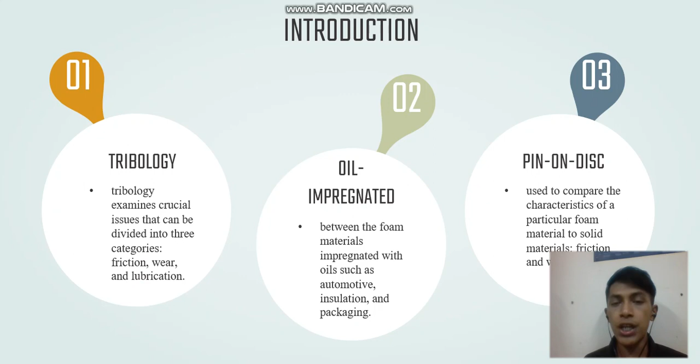Now to the literature review. First and foremost, oil impregnated materials, due to their low weight, excellent thermal and acoustic insulation, and high energy absorption - foams are frequently employed in engineering.

According to historical evidence, people have traditionally used vegetable oil as a medium to lessen friction and wear. Plus, researchers classify synthetic lubricants in various forms, including PAO, polyol ester, and polyalkylene glycol (PAG).

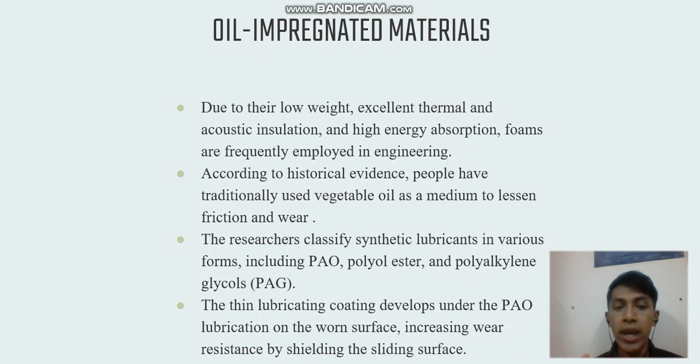The thin lubricating coating developed under PAO lubrication on the worn surface will increase the wear resistance by shielding the sliding surface.

For the other aspect of tribology, friction: friction is the force that prevents sliding, depending on the contact between sliding surfaces and operational factors including roughness, degree of work hardening, and surface cleanliness. Friction in a mechanical system may rise or decrease.

I will also use pin-on-disc testing to find the coefficient of sliding friction and wear. The sample is tested for up to a certain time at room temperature, with a linear velocity and vertical load applied.

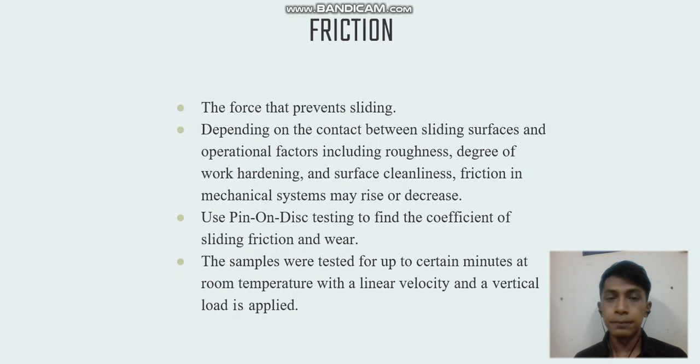For the other aspect of tribology, wear: wear happens when two surfaces in relative motion meet one another, generally in a dry run. Sarkar (1983) noticed that material is lost as debris, which is referred to as wear, when two components slide past one another.

The wear in a steady state pin is utilized to determine the wear rate when a load is applied. Thus, in this investigation, the researcher used the pin-on-disc to calculate the apparent contact pressure.

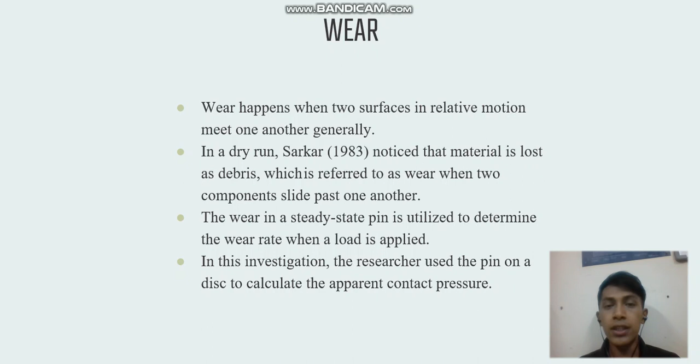I also studied lubrication. A lubricant is a substance that acts as a coating between two moving parts to reduce wear and friction. Lubrication occurs when two surfaces are coated with a lubricant. By adding an additive, the base fluid may create a new property or improve an existing one to increase the lubricant performance.

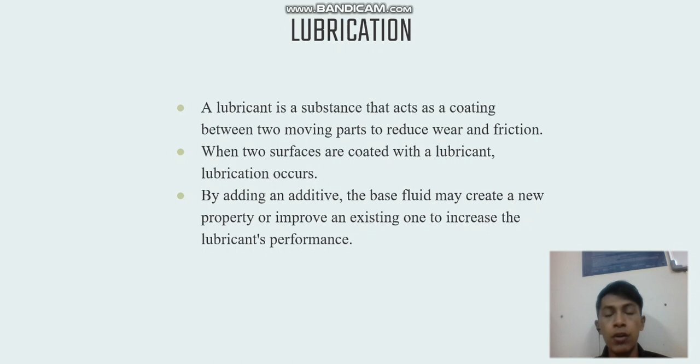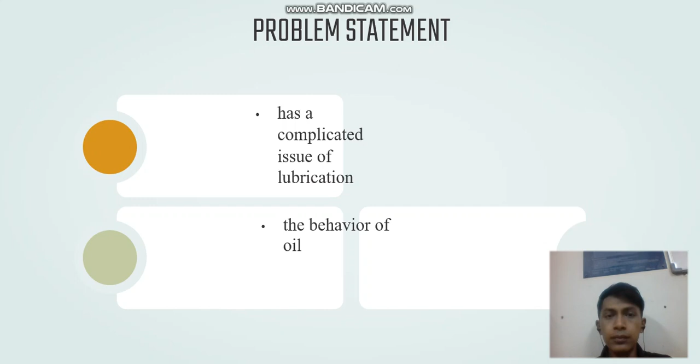I have listed the problem statement. First, in this study I have identified that there is a complicated issue of lubrication, and also the behavior of oil.

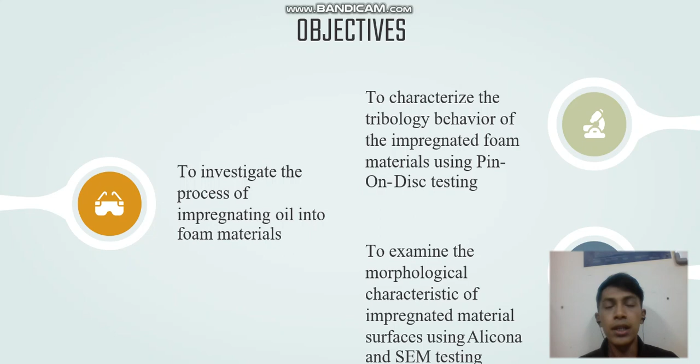So to achieve the study, we must first achieve the objectives. First, to investigate the process of impregnating oil into foam materials; then to characterize the tribology behavior of the impregnated foam materials using pin-on-disc testing; and then to examine the morphological characteristics of the impregnated material surface using Alicona and SEM (scanning electron microscope) testing.

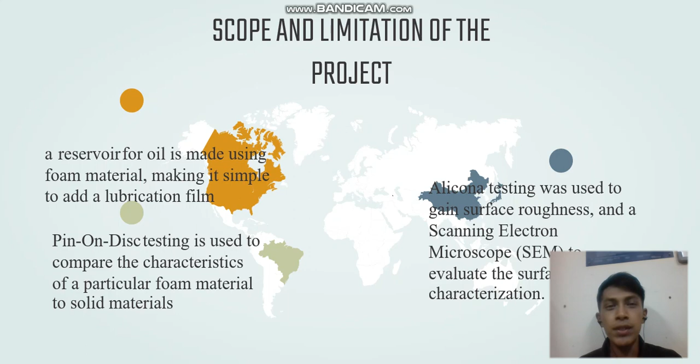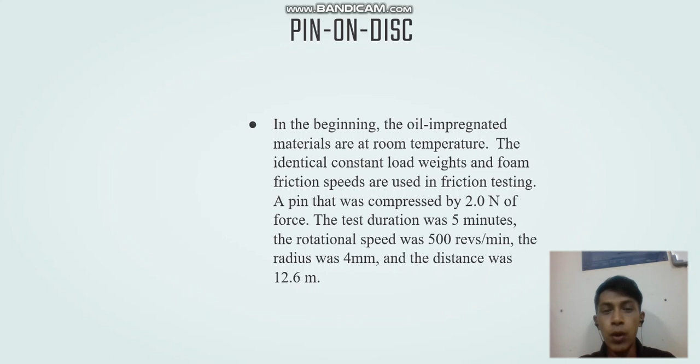For the fourth content, we go to methodology. Pin-on-disc: in the beginning, the oil impregnated materials are at room temperature, and identical constant load weight and friction speed are used in friction testing. A pin will compress by 2 Newtons of force for a duration of 5 minutes, with rotation speed of 500 revolutions per minute. The radius was 4 mm and the distance was 12.6 meters.

For the Alicona testing, it is an optical 3D measurement tool that uses the infinite focus microscope. Alicona was used to quantify and analyze the surface roughness.

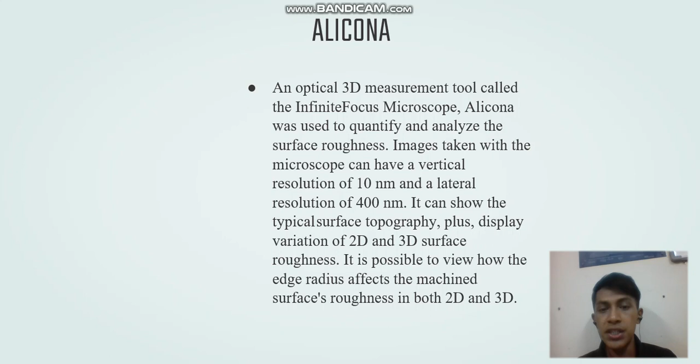When we use the microscope, it captures images with a vertical resolution of 10 and a lateral resolution of 400. It can show the typical surface topography plus display variation of 2D and 3D surface roughness. Thus, it is possible to view how the edge radius affects the machined surface roughness in both 2D and 3D.

Lastly, for the scanning electron microscopic analysis: SEM means a thin electron beam focused on the sample with high energy. In addition, the SEM generates high resolution images.

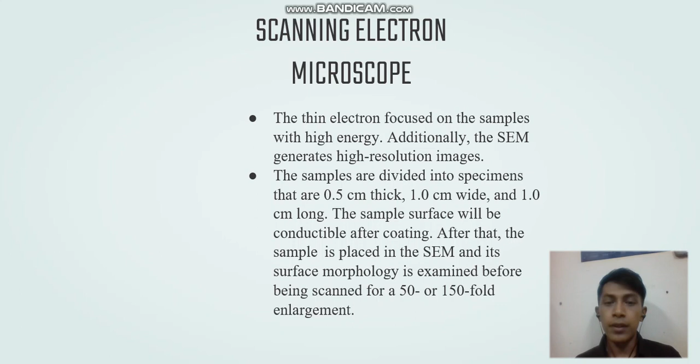To do this testing, the sample is divided into specimens that are 0.5 cm thick, 1.0 cm wide, and 1.0 cm long. The sample surface will be made conductive after coating. After that, the sample is placed in the SEM and its surface morphology is examined before being scanned for around 50 to 150 fold enlargement.

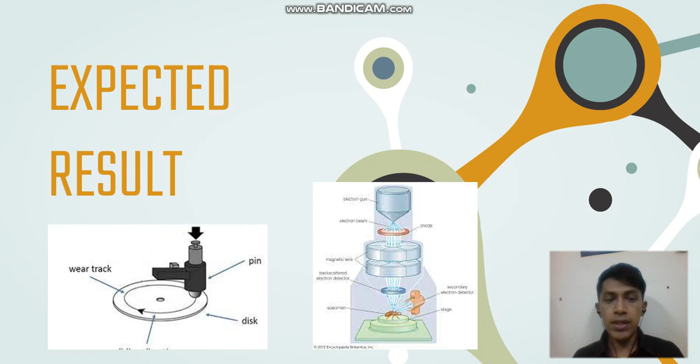Then for the expected result, that we have done for the 3 testings, which are pin-on-disc testing, Alicona testing, and SEM analysis.

I expect that oil impregnated material will produce optimum tribology performance and the lowest friction coefficient. As the friction reduces, wear will also reduce.

Then Alicona testing shows the surface roughness, that traditional 2D surface roughness is insufficient to capture the character of the surface, while 3D surface roughness can offer more accurate measurement in the image.